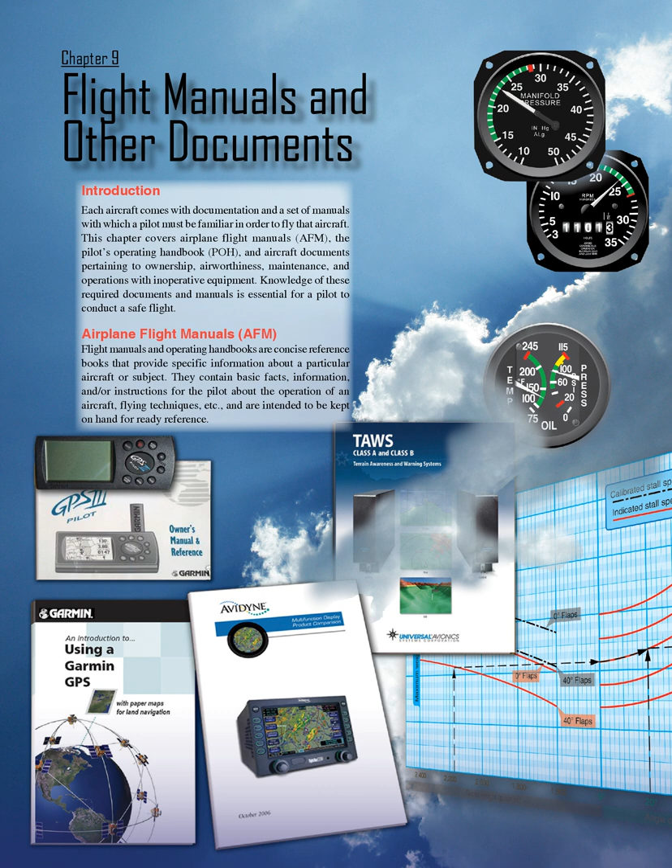The Aircraft Owner/Information Manual is a document developed by the aircraft manufacturer and contains general information about the make and model of the aircraft. The manual is not approved by the Federal Aviation Administration (FAA) and is not specific to an individual aircraft. The manual provides general information about the operation of an aircraft, is not kept current, and cannot be substituted for the AFM/POH.

An AFM is a document developed by the aircraft manufacturer and approved by the FAA. This book contains the information and instructions required to operate an aircraft safely. A pilot must comply with this information, which is specific to a particular make and model of aircraft, usually by serial number. An AFM contains the operating procedures and limitations of that aircraft.

Title 14 of the Code of Federal Regulations (14 CFR) Part 91 requires that pilots comply with the operating limitations specified in the approved flight manuals, markings, and placards.

Originally, flight manuals followed whatever format and content the manufacturer felt was appropriate, but this changed with the acceptance of Specification No. 1, prepared by the General Aviation Manufacturers Association (GAMA). Specification No. 1 established a standardized format for all general aviation airplane and helicopter flight manuals.

The POH is a document developed by the aircraft manufacturer and contains FAA-approved AFM information. If POH is used in the main title, a statement must be included on the title page indicating that sections of the document are FAA-approved as the AFM. The POH for most light aircraft built after 1975 is also designated as the FAA-approved flight manual.

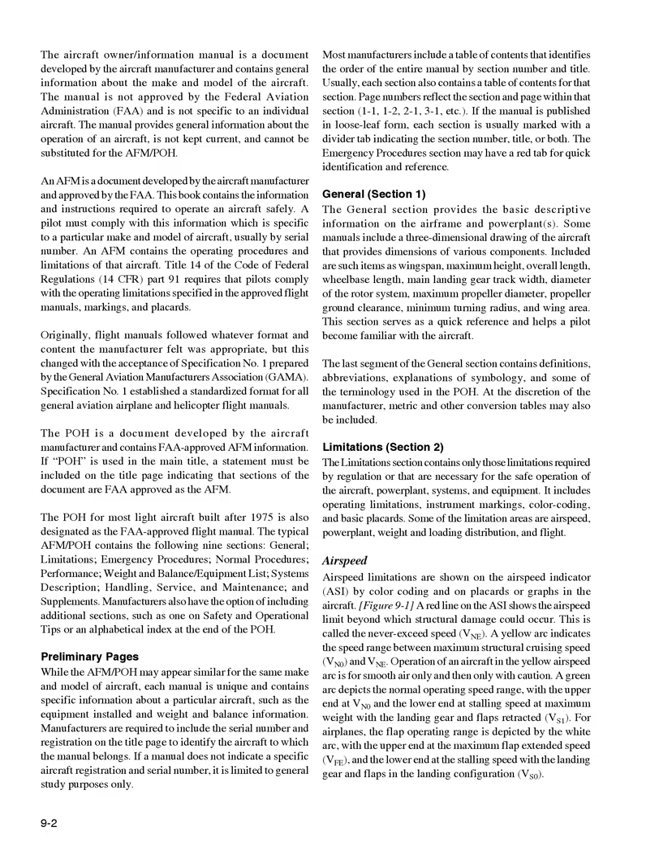In addition to the markings listed above, small multi-engine airplanes have a red radial line to indicate single-engine minimum controllable airspeed, VMC. A blue radial line is used to indicate single-engine best rate of climb speed at maximum weight at sea level, VYSE.

Power Plant. The power plant limitations portion describes operating limitations on an aircraft's reciprocating or turbine engines. These include limitations for takeoff power, maximum continuous power, and maximum normal operating power, which is the maximum power the engine can produce without any restrictions and is depicted by a green arc.

Other items that can be included in this area are the minimum and maximum oil and fuel pressures, oil and fuel grades, and propeller operating limits. In Figure 9.3, all reciprocating engine-powered aircraft must have a revolutions per minute (RPM) indicator for each engine.

Aircraft equipped with a constant speed propeller or rotor system use a manifold pressure gauge to monitor power output and a tachometer to monitor propeller or rotor speed. Both instruments depict the maximum operating limit with a red radial line and the normal operating range with a green arc. In Figure 9.4, some instruments may have a yellow arc to indicate a caution area.

Weight and loading distribution. Weight and loading distribution contains the maximum certificated weights, as well as the center of gravity (CG) range. The location of the reference datum used in balance computations is included in this section. Weight and balance computations are not provided in this area, but rather in the weight and balance section of the AFM/POH.

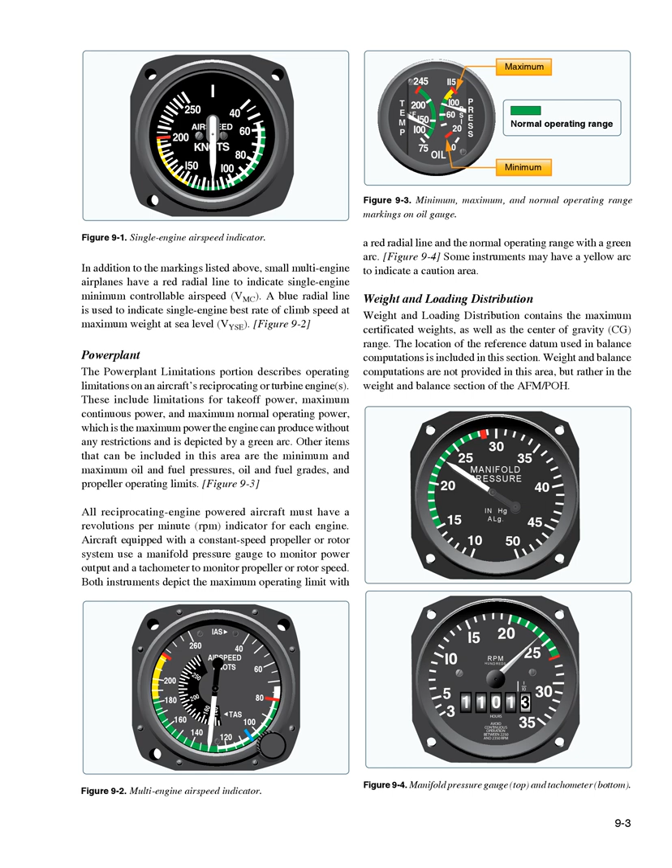Flight limits. Flight limits list authorized maneuvers with appropriate entry speeds, flight load factor limits, and types of operation limits. It also indicates those maneuvers that are prohibited, such as spins or acrobatic flight, as well as operational limitations such as flight into known icing conditions.

Placards. Most aircraft display one or more placards that contain information having a direct bearing on the safe operation of the aircraft. These placards are located in conspicuous places and are reproduced in the limitations section or as directed by an airworthiness directive (AD). Figure 9.5, airworthiness directives are explained in detail later in this chapter.

Emergency procedures, Section 3. Checklists describing the recommended procedures and airspeeds for coping with various types of emergencies or critical situations are located in the emergency procedures section. Some of the emergencies covered include engine failure, fire, and system failure. The procedures for in-flight engine restarting and ditching may also be included.

Manufacturers may first show an emergency checklist in an abbreviated form, with the order of items reflecting the sequence of action. Amplified checklists that provide additional information on the procedures follow the abbreviated checklist. To be prepared for emergency situations, memorize the immediate action items and, after completion, refer to the appropriate checklist.

Manufacturers may include an optional subsection entitled Abnormal Procedures. This subsection describes recommended procedures for handling malfunctions that are not considered emergencies.

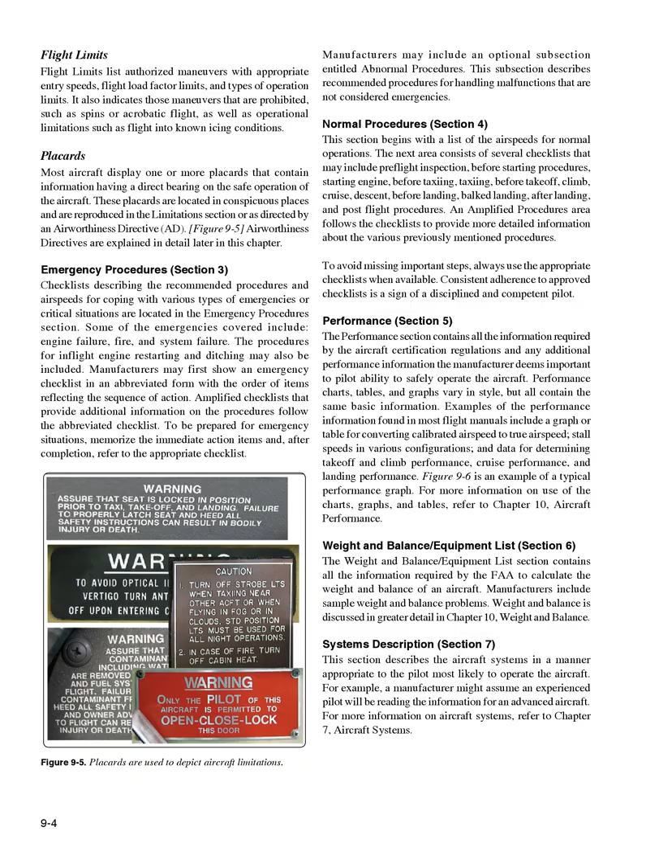Handling, Service, and Maintenance, Section 8. This section describes the maintenance and inspections recommended by the manufacturer, and the regulations. Additional maintenance or inspections may be required by the issuance of ADs applicable to the airframe, engine, propeller, or components.

This section also describes preventive maintenance that may be accomplished by certificated pilots, as well as the manufacturer's recommended ground handling procedures. It includes considerations for hangaring, tie-down, and general storage procedures for the aircraft.

Supplements, Section 9. The Supplements section contains information necessary to safely and efficiently operate the aircraft when equipped with optional systems and equipment, not provided with the standard aircraft. Some of this information may be supplied by the aircraft manufacturer or by the manufacturer of the optional equipment. The appropriate information is inserted into the flight manual at the time the equipment is installed.

Autopilots, navigation systems, and air conditioning systems are examples of equipment described in this section. Figure 9.7.

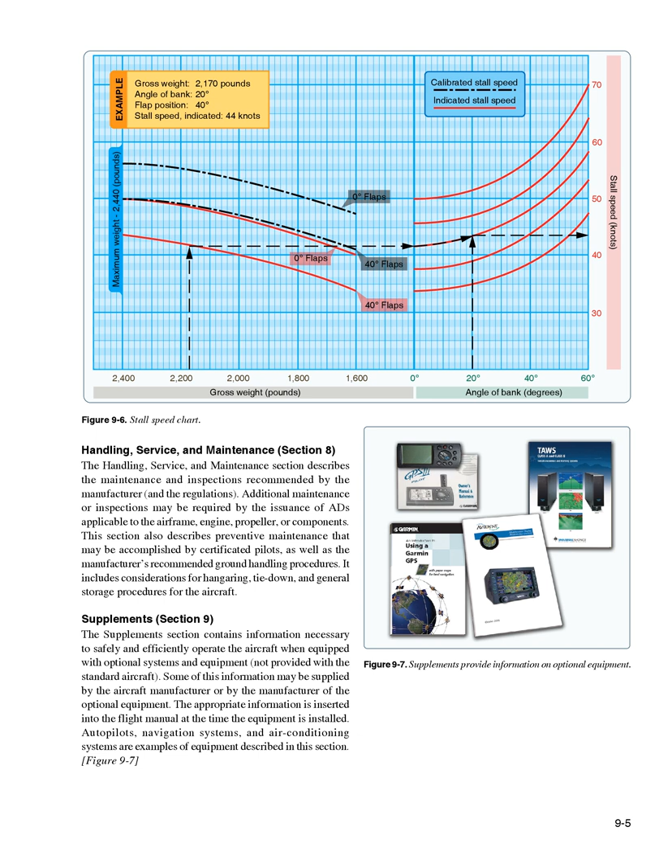Safety Tips, Section 10. This Safety Tips section is an optional section containing a review of information that enhances the safe operation of the aircraft. For example, physiological factors, general weather information, fuel conservation procedures, high-altitude operations, or cold weather operations might be discussed.

Aircraft Document: Certificate of Aircraft Registration. Before an aircraft can be flown legally, it must be registered with the FAA Aircraft Registry. The Certificate of Aircraft Registration, which is issued to the owner as evidence of the registration, must be carried in the aircraft at all times.

Figure 9.8. The Certificate of Aircraft Registration cannot be used for operations when the aircraft is registered under the laws of a foreign country, the aircraft's registration is cancelled upon written request of the certificate holder, the aircraft is totally destroyed or scrapped, the ownership of the aircraft is transferred, or the certificate holder loses United States citizenship.

For additional information, see 14 CFR Part 47, Section 47.41. When one of the events listed in that section occurs, the previous owner must notify the FAA by filling in the back of the Certificate of Aircraft Registration, and mailing it to FAA Aircraft Registration Branch, AFS 750, PO Box 25504, Oklahoma City, Oklahoma.

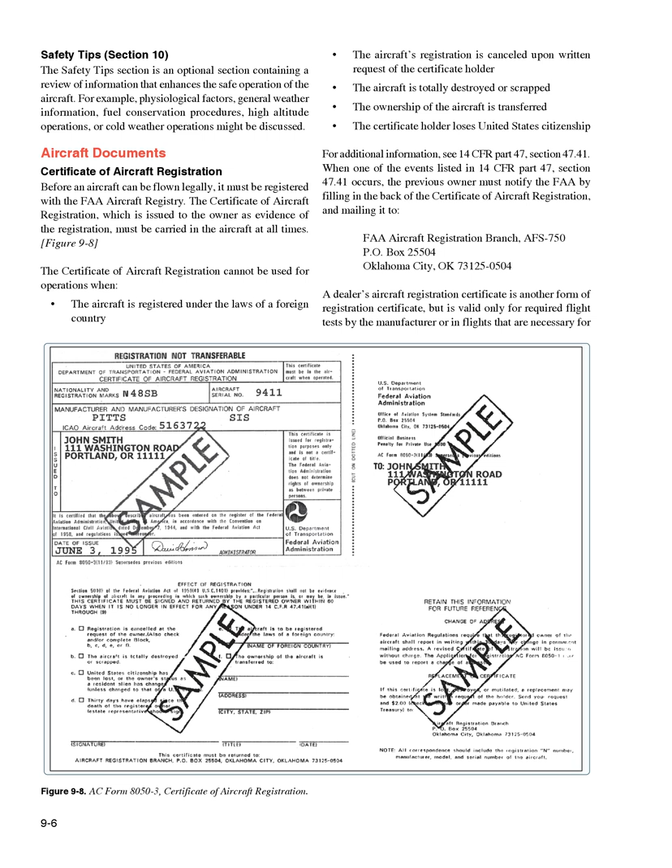73125-0504. A dealer's aircraft registration certificate is another form of registration certificate, but is valid only for required flight tests by the manufacturer or for flights that are necessary for the sale of the aircraft by the manufacturer or a dealer. The dealer must remove the certificate when the aircraft is sold.

Upon complying with 14 CFR Part 47, Section 47.31, the pink copy of the application for an aircraft registration application, Aeronautical Center Form 8050-1, provides authorization to operate an unregistered aircraft for a period not to exceed 90 days. Since the aircraft is unregistered, it cannot be operated outside of the United States until a permanent certificate of aircraft registration is received and placed in the aircraft.

The FAA does not issue any certificate of ownership or endorse any information with respect to ownership on a certificate of aircraft registration. Note: for additional information concerning the aircraft registration application or the aircraft bill of sale, contact the nearest FAA Flight Standards District Office, FSDO.

An airworthiness certificate is issued by a representative of the FAA after the aircraft has been inspected, found to meet the requirements of 14 CFR Part 21, and is in condition for safe operation.

The airworthiness certificate must be displayed in the aircraft so it is legible to the passengers and crew whenever it is operated. It must remain with the aircraft unless it is sold to a foreign purchaser.

A standard airworthiness certificate is issued for aircraft type certificated in the normal, utility, acrobatic, commuter, and transport categories, and manned free balloons. Figure 9.9 illustrates a standard airworthiness certificate, and an explanation of each item in the certificate follows.

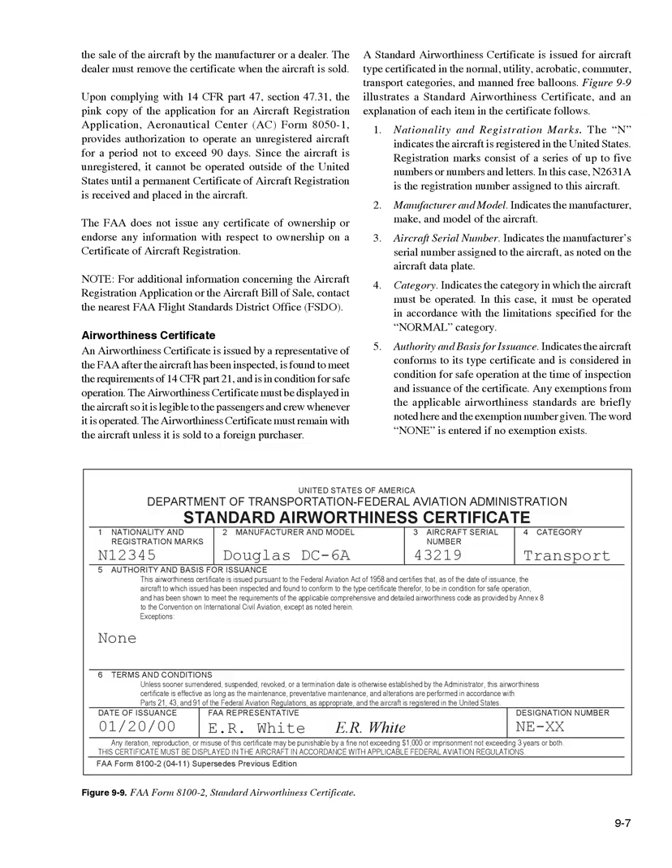Item 6, Terms and Conditions, indicates the airworthiness certificate is in effect indefinitely if the aircraft is maintained in accordance with 14 CFR Parts 21, 43, and 91, and the aircraft is registered in the United States.

Also included are the date the certificate was issued and the signature and office identification of the FAA representative. A standard airworthiness certificate remains in effect if the aircraft receives the required maintenance and is properly registered in the United States.

Flight safety relies in part on the condition of the aircraft, which is determined by inspections performed by mechanics, approved repair stations, or manufacturers that meet specific requirements of 14 CFR Part 43. A special airworthiness certificate is issued for all aircraft certificated in other than the standard classifications, such as experimental, restricted, limited, provisional, and light sport aircraft (LSA).

LSA receive a pink special airworthiness certificate. However, there are exceptions. For example, the Piper Cub is in the LSA category, but it was certificated as a normal aircraft during its manufacture.

When purchasing an aircraft classified as other than standard, it is recommended that the local FSDO be contacted for an explanation of the pertinent airworthiness requirements and the limitations of such a certificate.

Aircraft maintenance. Maintenance is defined as the preservation, inspection, overhaul, and repair of an aircraft, including the replacement of parts. Regular and proper maintenance ensures that an aircraft meets an acceptable standard of airworthiness throughout its operational life.

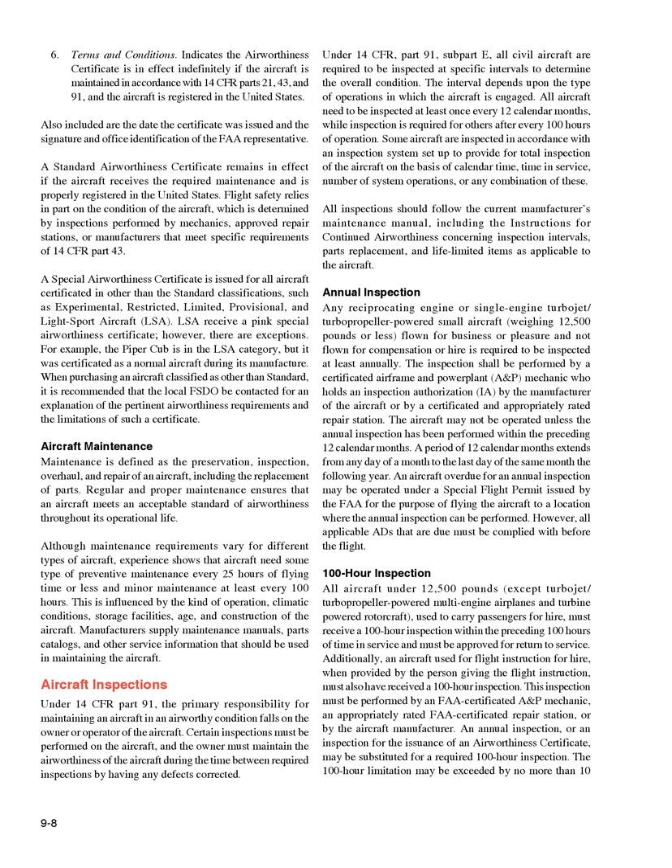This inspection must be performed by an FAA certificated A&P mechanic, an appropriately rated FAA certificated repair station, or by the aircraft manufacturer. An annual inspection, or an inspection for the issuance of an airworthiness certificate, may be substituted for a required 100-hour inspection. The 100-hour limitation may be exceeded by no more than 10 hours for the purpose of traveling to a location at which the required inspection can be performed. Any excess time used for this purpose must be included in computing the next 100 hours of time in service.

Other inspection programs. The annual and 100-hour inspection requirements do not apply to large, over 12,500 pounds, airplanes, turbojets, or turbopropeller-powered multi-engine airplanes, or to aircraft for which the owner complies with a progressive inspection program. Details of these requirements may be determined by referencing 14 CFR, Part 43, Section 43.11 and 14 CFR Part 91, Subpart E, or by inquiring at a local FSDO.

Altimeter system inspection. Under 14 CFR, Part 91, Section 91.411, requires that the altimeter, encoding altimeter, and related system must be tested and inspected within the 24 months prior to operating in controlled airspace under Instrument Flight Rules, IFR. This applies to all aircraft being operated in controlled airspace.

Transponder inspection. Title 14 CFR, Part 91, Section 91.413, requires that before a transponder can be used under 14 CFR, Part 91, Section 91.215a, it shall be tested and inspected within the 24 months prior to operation of the aircraft regardless of airspace restrictions.

Emergency locator transmitter. An emergency locator transmitter, ELT, is required by 14 CFR, Part 91, Section 91.207, and must be inspected within 12 calendar months after the last inspection for the following: proper installation, battery corrosion, operation of the controls and crash sensor, the presence of a sufficient signal radiated from its antenna.

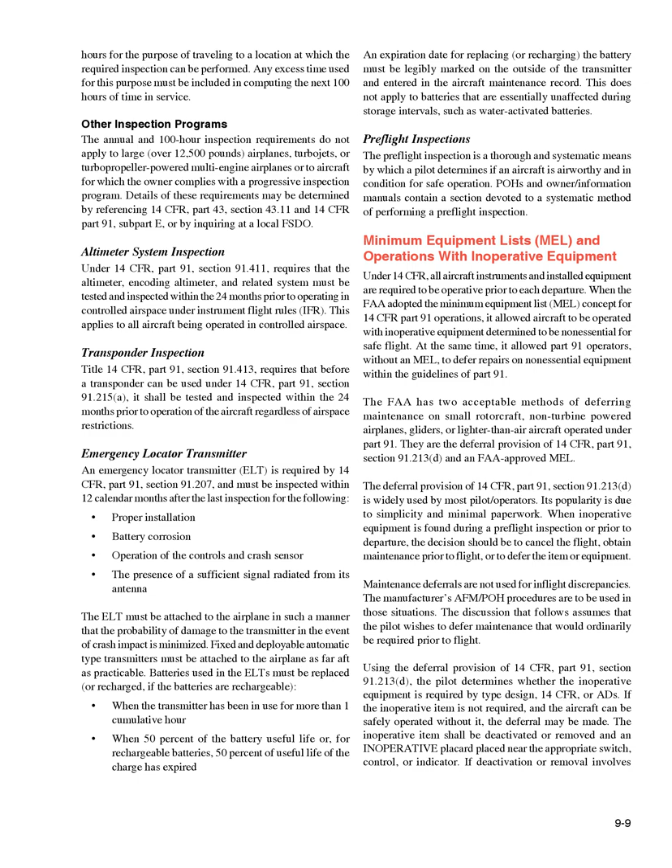If deactivation or removal involves maintenance, removal always will, it must be accomplished by certificated maintenance personnel and recorded in accordance with 14 CFR Part 43. For example, if the position lights, installed equipment, were discovered to be inoperative prior to a daytime flight, the pilot would follow the requirements of 14 CFR Part 91, Section 91.213d.

The deactivation may be a process as simple as the pilot positioning a circuit breaker to the off position, or as complex as rendering instruments or equipment totally inoperable. Complex maintenance tasks require a certificated and appropriately rated maintenance person to perform the deactivation. In all cases, the item or equipment must be placarded inoperative.

All small rotorcraft, non-turbine powered airplanes, gliders, or lighter-than-air aircraft operated under 14 CFR Part 91 are eligible to use the maintenance deferral provisions of 14 CFR Part 91, Section 91.213d. However, once an operator requests an MEL, and a letter of authorization, LOA, is issued by the FAA, then the use of the MEL becomes mandatory for that aircraft.

All maintenance deferrals must be accomplished in accordance with the terms and conditions of the MEL and the operator-generated procedures document. The use of an MEL for an aircraft operated under 14 CFR Part 91 also allows for the deferral of inoperative items or equipment. The primary guidance becomes the FAA-approved MEL issued to that specific operator and N-numbered aircraft.

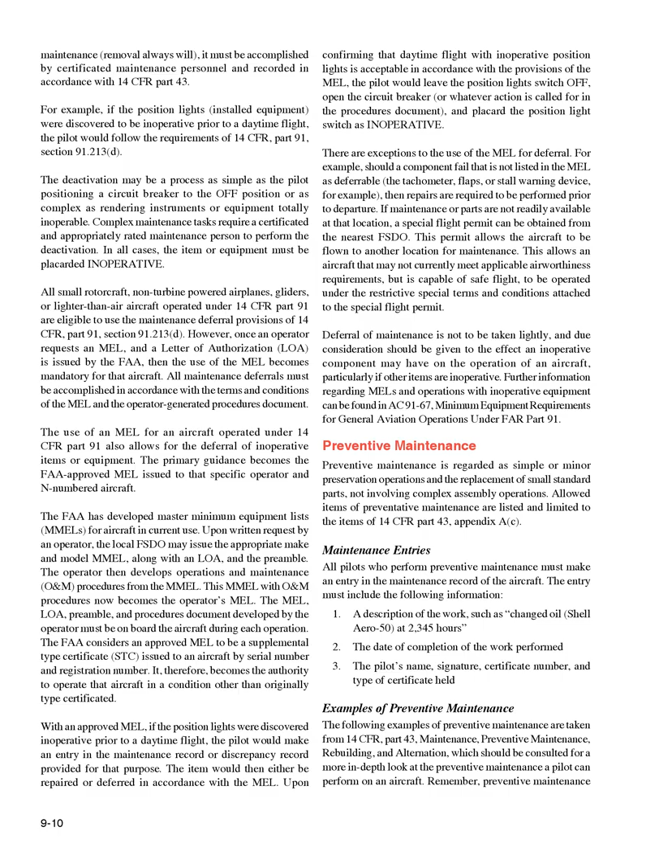This includes the following: removal, installation, and repair of landing gear tires and shock cords; servicing landing gear shock struts by adding oil, air, or both; and servicing landing gear wheel bearings.

Replacing defective safety wiring or cotter keys; lubrication not requiring disassembly other than removal of non-structural items, such as cover plates, cowlings, and fairings; making simple fabric patches not requiring rib stitching or the removal of structural parts or control surfaces. In the case of balloons, making small fabric repairs to envelopes, as defined in and in accordance with the balloon manufacturer's instructions, not requiring load tape repair or replacement.

Replenishing hydraulic fluid in the hydraulic reservoir; refinishing decorative coating of fuselage, balloon baskets, wings, tail group surfaces, excluding balanced control surfaces, fairings, cowlings, landing gear, cabin, or flight deck interior, when removal or disassembly of any primary structure or operating system is not required.

Applying preservative or protective material to components where no disassembly of any primary structure or operating system is involved and where such coating is not prohibited or is not contrary to good practices.

Repairing upholstery and decorative furnishings of the cabin, flight deck, or balloon basket interior when the repair does not require disassembly of any primary structure or operating system, or interfere with an operating system, or affect the primary structure of the aircraft. Making small, simple repairs to fairings, non-structural cover plates, cowlings, and small patches and reinforcements not changing the contour so as to interfere with proper airflow.

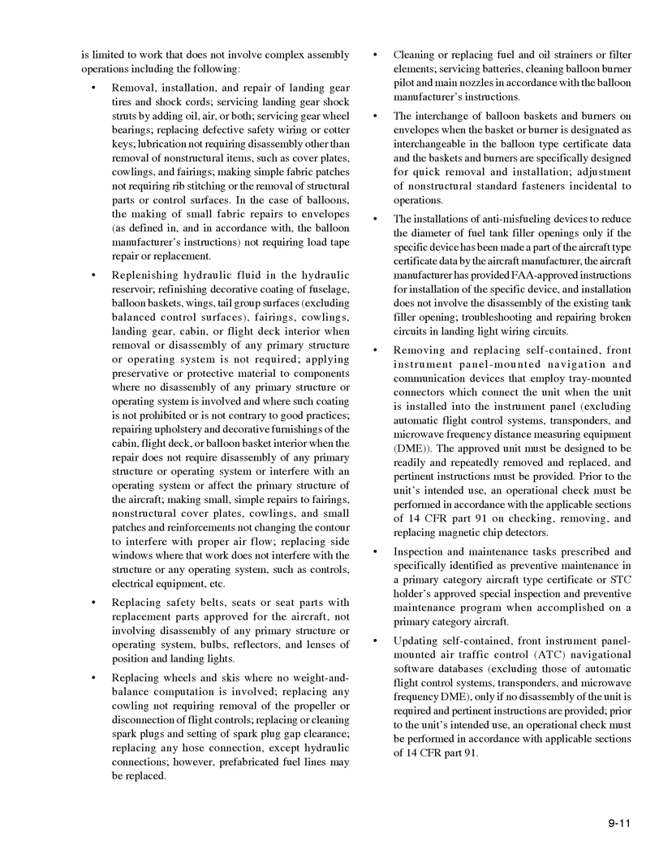Updating self-contained, front instrument panel mounted air traffic control (ATC) navigational software databases, excluding those of automatic flight control systems, transponders, and microwave frequency DME, only if no disassembly of the unit is required and pertinent instructions are provided. Prior to the unit's intended use, an operational check must be performed in accordance with applicable sections of 14 CFR Part 91.

Certificated pilots, excluding student pilots, sport pilots, and recreational pilots, may perform preventive maintenance on any aircraft that is owned or operated by them, provided that the aircraft is not used in air carrier service and does not qualify under 14 CFR Parts 121, 129, or 135.

A pilot holding a sport pilot certificate may perform preventive maintenance on an aircraft owned or operated by that pilot if that aircraft is issued a special airworthiness certificate in the LSA category. Sport pilots operating LSA should refer to 14 CFR Part 65 for maintenance privileges. 14 CFR Part 43, Appendix A, contains a list of the operations considered to be preventive maintenance.

Repairs and alterations are classified as either major or minor. 14 CFR Part 43, Appendix A, describes the alterations and repairs considered major. Major repairs or alterations shall be approved for return to service on FAA Form 337, Major Repair and Alteration, by an appropriately rated certificated repair station, an FAA certificated A&P mechanic holding an IA, or a representative of the administrator. Minor repairs and minor alterations may be approved for return to service with a proper entry in the maintenance records by an FAA certificated A&P mechanic or an appropriately certificated repair station.

For modifications of experimental aircraft, refer to the operating limitations issued to that aircraft. Modifications in accordance with FAA Order 8130.2, Airworthiness Certification of Aircraft and Related Products, may require notification of the issuing authority. Special flight permits.

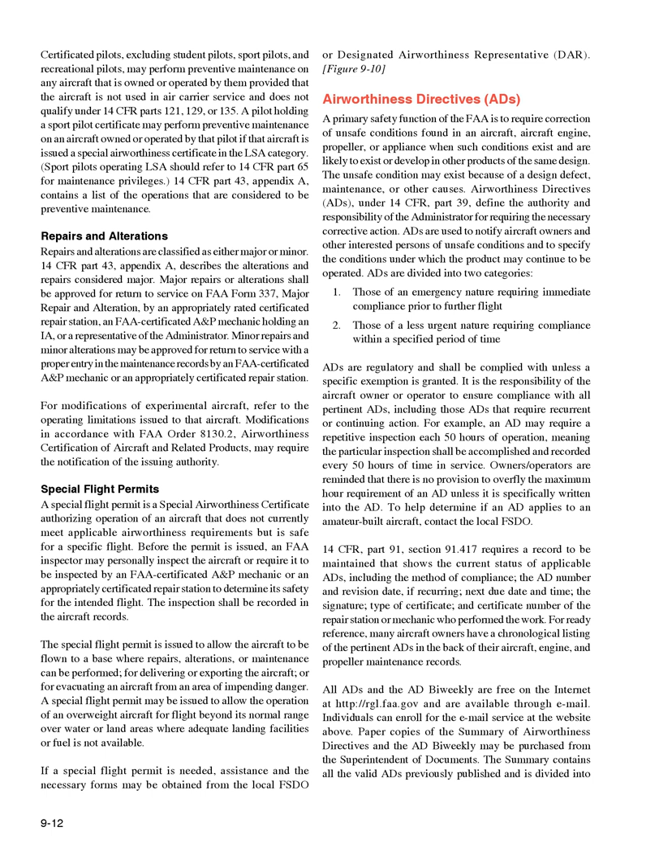The small aircraft and helicopter books contain all ADs applicable to small aircraft, 12,500 pounds or less maximum certificated takeoff weight, and ADs applicable to all helicopters. The large aircraft books contain all ADs applicable to large aircraft.

For current information on how to order paper copies of AD books and the AD biweekly, visit the FAA Online Regulatory and Guidance Library at http://rgl.faa.gov. Aircraft owner/operator responsibilities: the registered owner/operator of an aircraft is responsible for having a current airworthiness certificate and a certificate of aircraft registration in the aircraft.